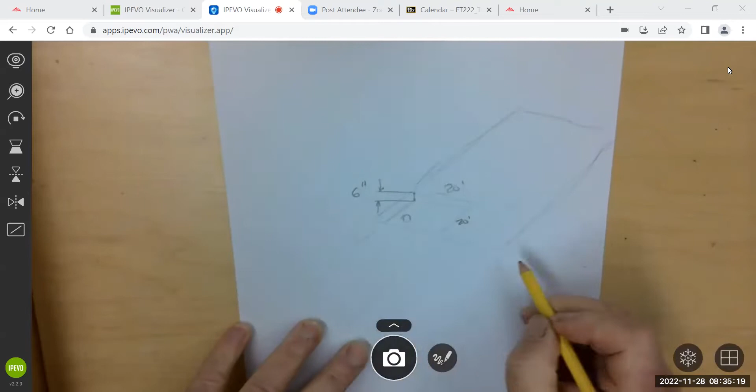Well, which dimension are you thinking here? So we got this dimension, I'm talking like the whole thing, like parking lot. Not the whole thing. So when we were out there, we identified areas of the parking lot that went to a drain. I mean, like, what should I title the sheet? Like parking lot runoff lab? Yeah, perfect. Parking lot runoff lab. Yep.

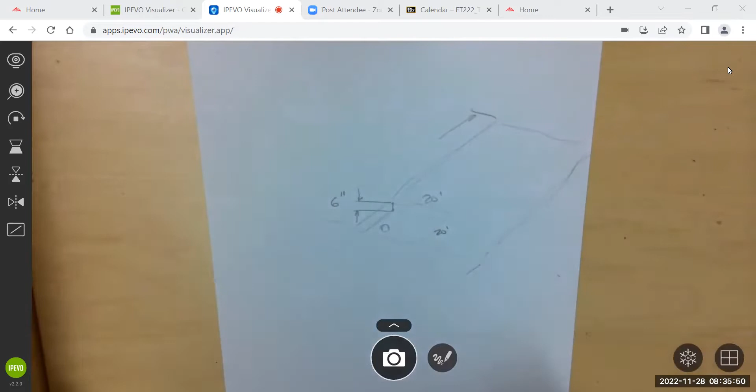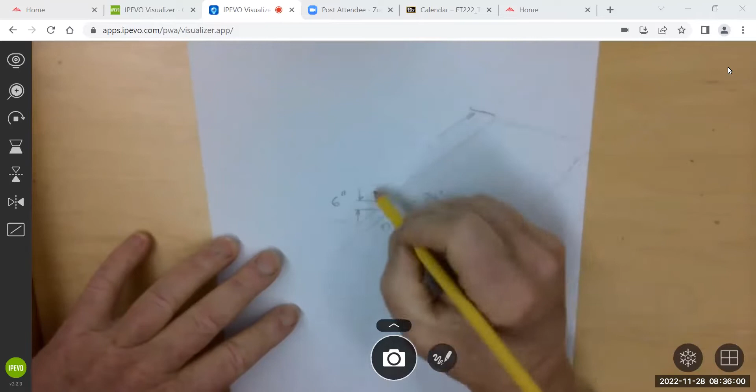Want the dimension? Yeah, if you got them. Yeah, so from this, the long one. Yep. Hold on, I'm adding it up. Or do you have it? Yeah, 123 and a half feet. Is that including the 20? Yeah. 123. Are you sure? Didn't you start at the bottom corner of it? I think when you started stepping.

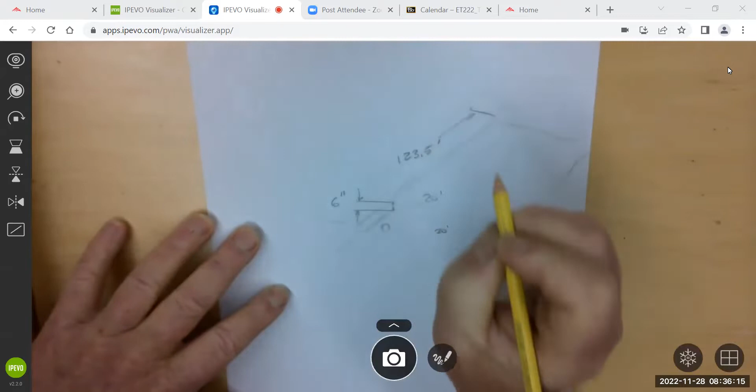No, like how she drew it and what I remember was I started at the corner. That corner of the 20 by 20 right there. Here. Yeah, that's right here. I remember, okay, when I went from left to right, that's where I started, but when I went from bottom to top, I started on the top right corner of the 20. You did start at the top right? Yeah, I started right there.

And went this way? Walked that way, and it was like 103. Yeah, so 34 and a half steps. Okay, so it was 103. Yeah, 103 and a half from that point to the edge. And then from left to right, it was like 42 feet. Oh, the overall? No, here. Yeah, from there, 42 feet. 42. Okay, perfect.

And we said an inch an hour? You wanted to do a quarter inch and an inch. You wanted us to do both. Okay, so quarter inch is when it starts to move. Yeah, and then an inch. Because we had this at 1 degree slope. And our goal was to determine if this was big enough, right? Before it enters the drain.

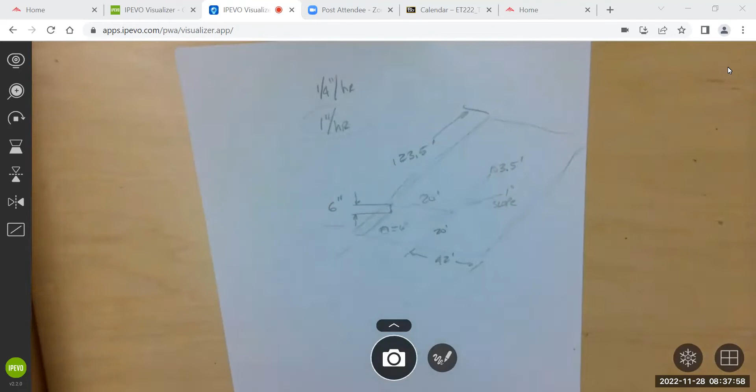So I think we're gonna say the drain is 6 inches tall also. So then we get this 20 by 20 by 6 inches of reservoir basically to capture this storm. And we're gonna do a quarter inch to see how much that is when it first starts moving. And then we'll do the full inch, which is the 100-year storm. Did I say 3 hours or just 1 hour? Okay, we'll just do 1 hour.

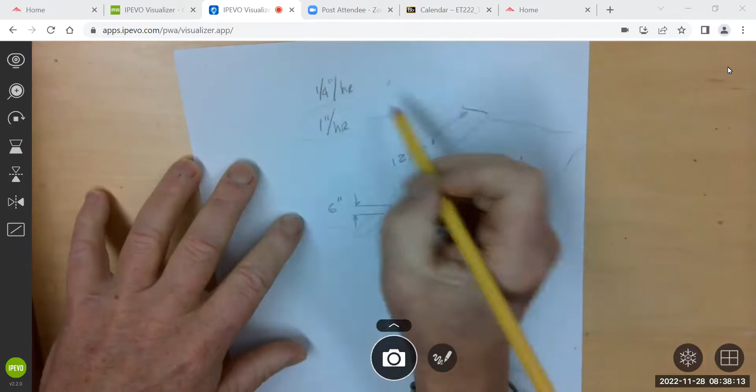What are we finding? So what you want to know is in both a quarter inch an hour, and actually it was just a quarter inch, so that would be probably the 15 minutes. But anyway, for the 1 inch per hour, it will fall in this area and it'll drain to here. Okay, we want to know if this is big enough because this is what exists in our parking lot.

So for the 100-year storm, is this big enough to actually absorb this water without going into the drain, which is really how we want those swales or rainwater capture systems to work. We don't really want it to exit into the runoff system. We'd rather have the ground absorb it. Keep it out of the storm drain system that exists.

So not everyone had all the data or had all the procedures, so we'll just let this one come in on Wednesday, along with the next one.

So all we're doing, we're getting not necessarily the flow, but how much. Yeah, just a quantity thing, yep. And then you get the area and the volume. Yep. It's really just a volume comparison is all this one is. Wow. The next one's more difficult, because that one's gonna be a flow comparison. The next lab? The next lab, yeah. I'll think about that.

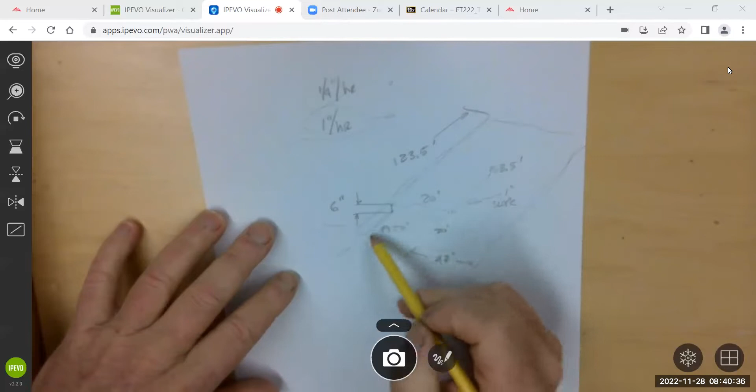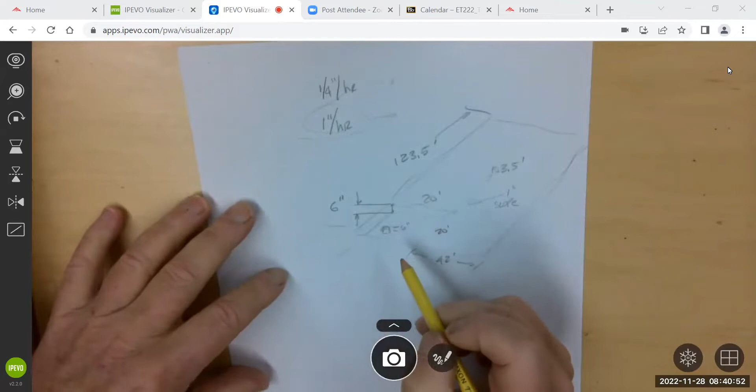Is that 6 inches of depth for everything or just? Yeah, it's 6 inches all the way around, 6 inches for that. There's a drain pipe that sticks up in the swale. So in this swale, or this low area, capture area, there's a drain pipe that sticks up 6 inches, has a dome to it, you know, with a kind of a screen. So if this overflows, it does have a place to go. It goes into that drain, but we really don't want that to happen. We want the system designed to accept the water and give it back to the ground.

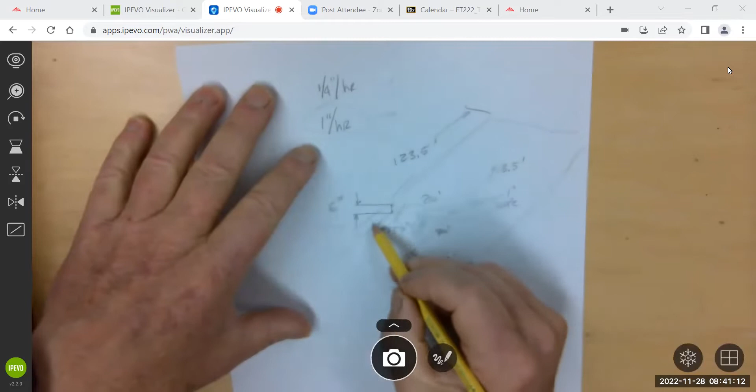So for the volume, we would just assume that everything is 6 inches. Yeah. And there's a bunch of plants in the thing too, like it's full of vegetation, right? Which is gonna do some absorbing for us once this water comes in. But by design, for sure, absolutely. Yep.

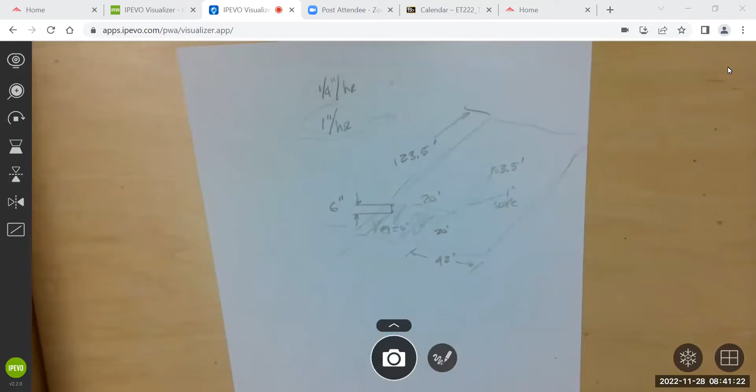We want to use the area of the 20 by 20 because the rain hits it, right? So it's kind of already collected. Yeah, you include that, absolutely. It's already collected there, so the water doesn't have to move there, it's already there. Yeah, so the inch an hour is gonna be over this entire area, right? It's gonna rain in the swale also. So this whole area sees the rain. So you do want to include that with your calculation on volume of water going into the system.

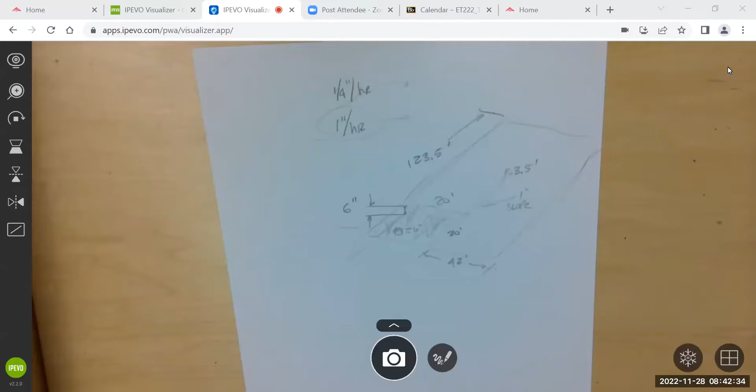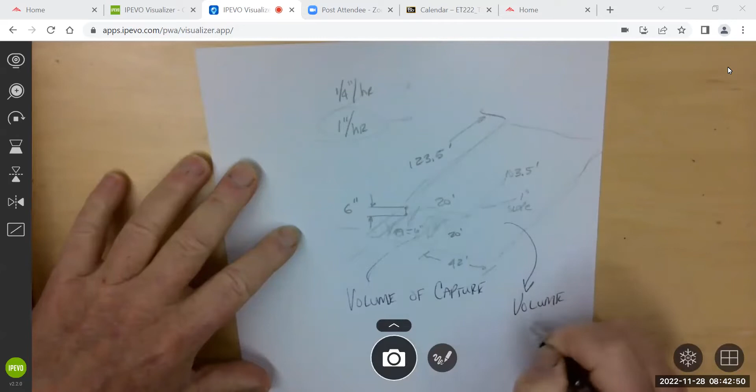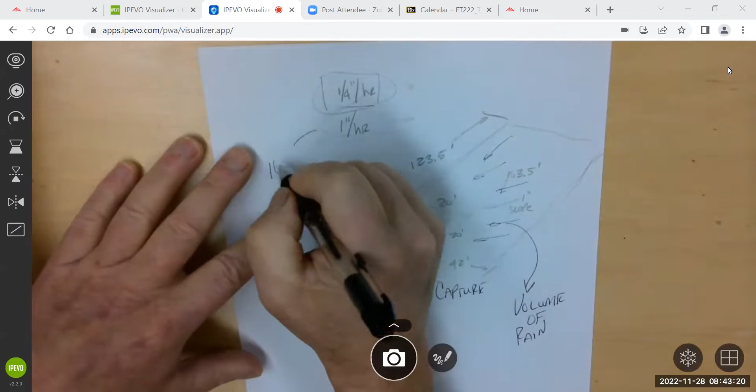That's 1/4 inch per hour and 1 inch. Yeah, so the 1/4 inch is when all the water starts to flow. So we do that calculation often, just to see, okay, water's beginning to flow. What kind of an impact is that gonna make in the swale? And then the 100-year storm will put down an inch an hour. So then we want to see, okay, in the worst case scenario, is this thing gonna work?

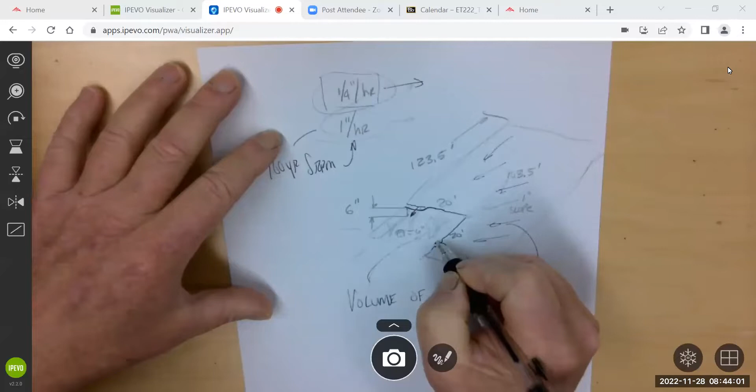Like the 1/4 inch an hour would be what we would do if we were gonna do an analysis of, say, because there's a low area, right, that comes down that provides a trough for it to flow in. So maybe we were gonna calculate, like, are those two low areas big enough to take the 1/4 inch an hour of water that's gonna start flowing, right? You would use it for that. But we're not doing that. They were pretty big. I'm sure they accepted just fine.

And this is not including any of the fact that there were the plants in there that are gonna absorb the water. That's right. Assuming that the drain itself would start receiving, we wanna know, would this thing collect all the water before it has to drain? Yep. Okay. Yeah, so the theory is, if it collects and holds the water, then that vegetation will just help dissipate it. It creates a network system in the soil.

It's not that the plants absorb the water, they do, but not much, right? They're not that big of plants. But they've created a structure of soil that allows the water to go into the ground. Rather than if you didn't have any plants in there, it would just become hard packed, or that doesn't absorb. It basically would turn to not concrete, but pretty close. So that's why they put those.

And I think it's very rooty vegetation they put in there, like grasses and things that, like, if you've pulled grass before, that structure is, like, you pull it and then most of the soil comes with it because it's created this mat that will absorb water. So you're probably getting another full 6 inches of water absorption, that allowed the upper 6 to go into the ground.

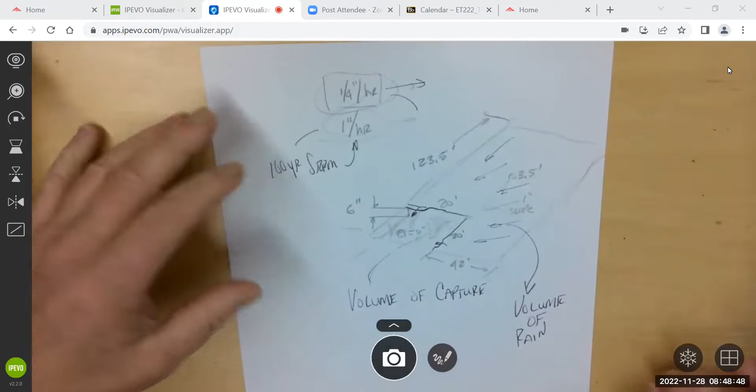Okay, on this next one, you have multiple things to do. This is a bigger lab. And this will be our last rainwater runoff lab. We'll move on from there. So I am recording this, so you can go back if you miss this first part. I'm pausing because there's an engineering meeting going on. I'm gonna let that meeting finish.

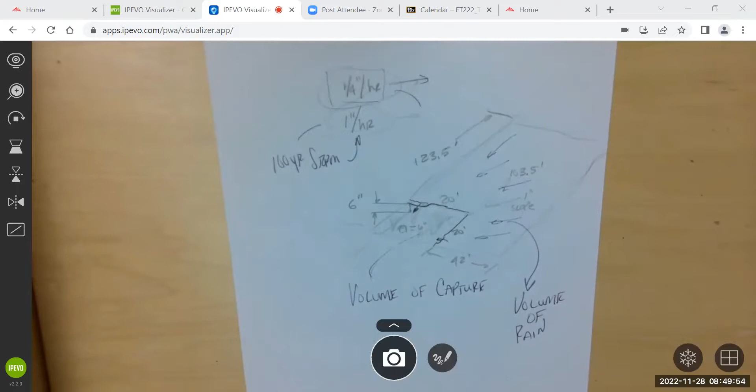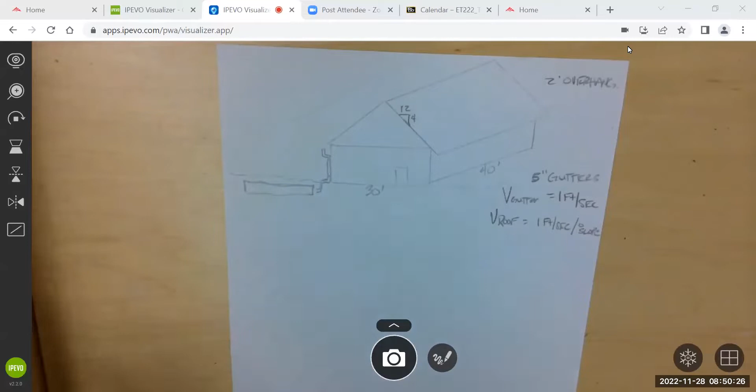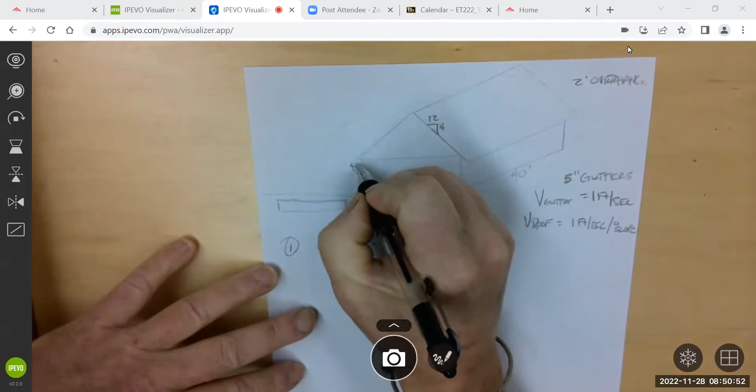All right, so the next one is gonna be a rainwater roof calculation, and we're gonna check several things. So let me just write out what we're gonna check, and then we'll talk our way through it. So we're gonna go and check gutter size. And these are 5-inch gutters. That's what they're called. If you look that up, it doesn't mean they're 5 inches deep or 5 inches wide. It's just a call out for a gutter size. There are 4-inch, 3-inch, and 5-inch gutters. So just look it up and you'll get a profile and you can come up with an area. An approximate area is fine.

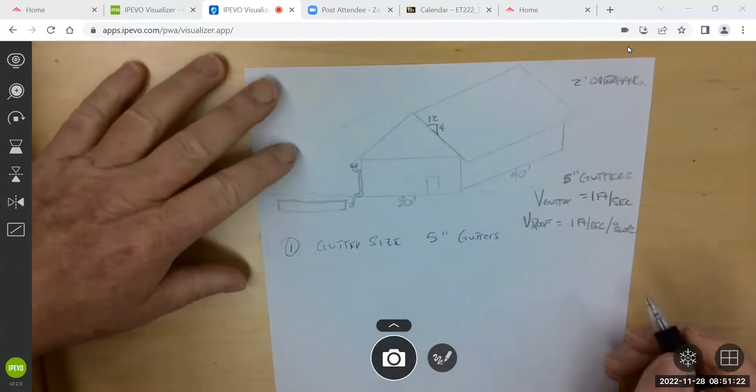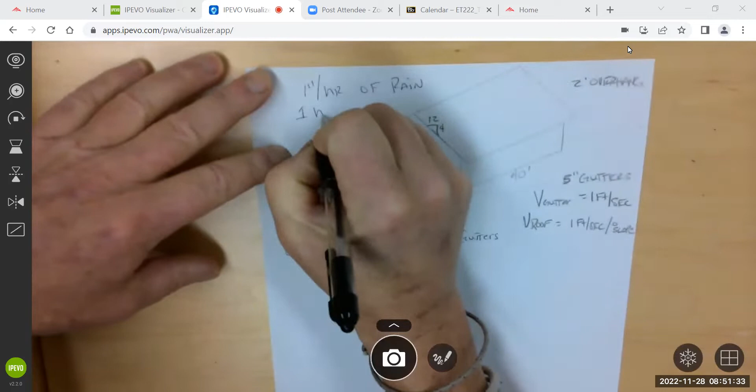We're gonna work with 1 inch an hour of rain, and we'll just do 1 hour. So that's how we'll get our volume. Our roof pitch is 12/4. So that sets up an angle that you can calculate. And actually this drawing is not to scale. That's closer to a 6. So really a 12/4 is pretty flat. I just happened to draw it kind of pitchy. Okay. But what that'll set up is an angle that you can calculate in degrees.

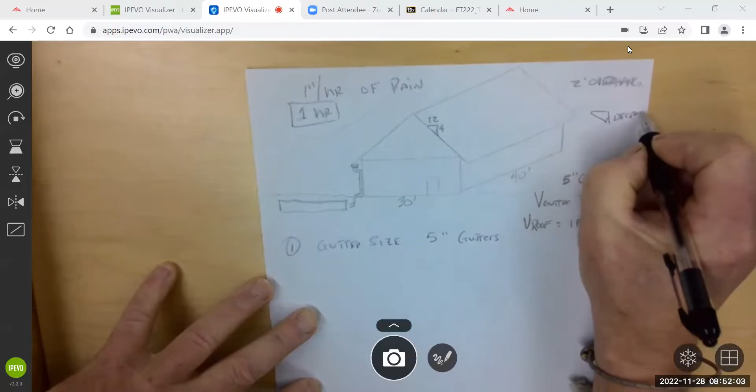Right? We can all do that because it's a 12-4 triangle. So you can just use your 12 and your 4 and the tangent to get this angle, right? Theta. Everyone with me? Okay.

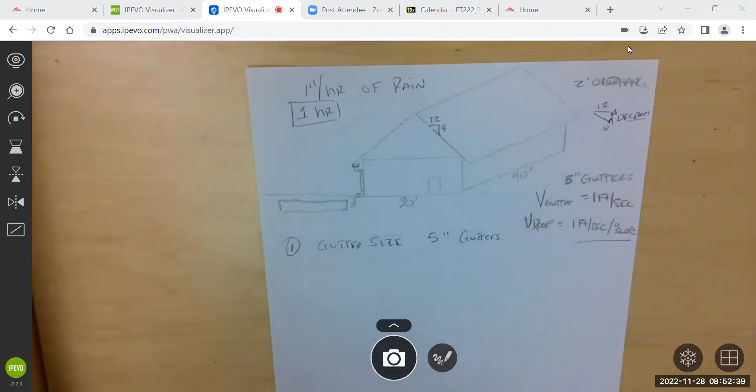For every degree, we're going to get 1 foot per second of velocity. So your standard sidewalk's like a 1 degree slope, right? That's where we got the 1 foot per second. So if it was a 10 degree slope, you'd definitely feel that. That's quite a slope. That's going to be 10 feet per second of velocity. Okay, so whatever you calculate for the angle of your roof, that's going to set up the velocity of the water.

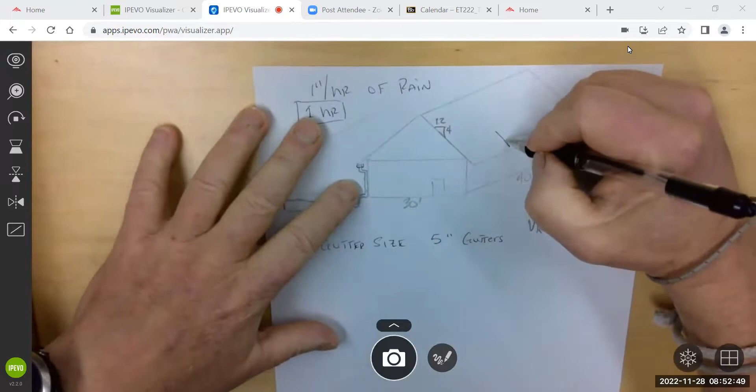For every degree, you're going to get 1 foot per second. Makes sense? So maybe we should calculate that because then we can talk it out. I'll just do it real quick. 12, 4, and tangent. It's supposed to be the arc tangent, sorry. Anyone get a number? Theta? Yeah, so if you set up 4/12, the tangent of the angle equals 4/12, so it's going to be the inverse tangent. 18.4.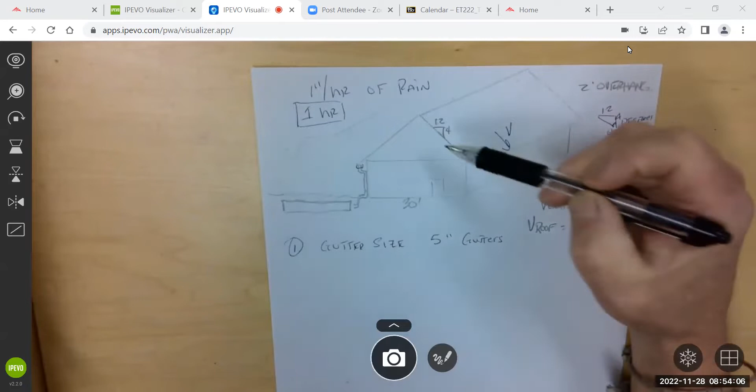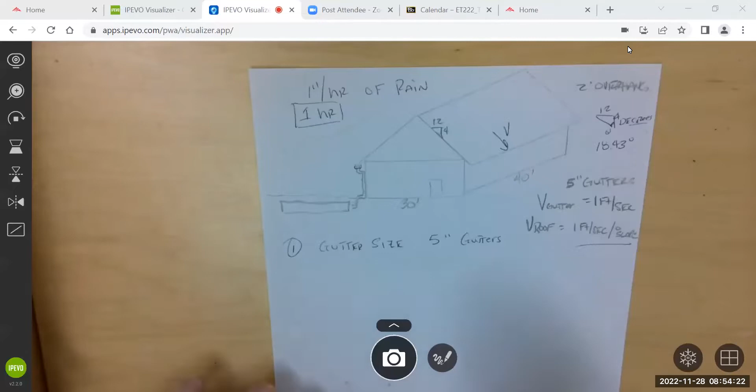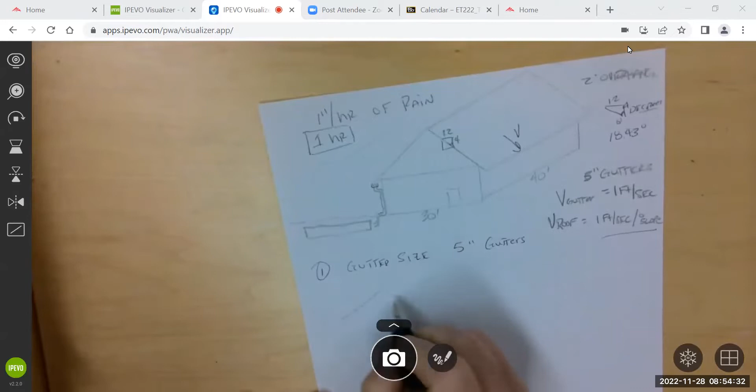Inverse tangent should be 18, yeah, for this lower one. For this little one, that's this one up here. If you did 4/12, right, we want that smaller slope. 18.43 is what I get. It's 71. You did 12/4? I did 4/12. It's opposite over adjacent. So for this one, yeah, but we want that lower angle because the roof pitch is going to be super flat. So we want this angle. We don't want this angle up here.

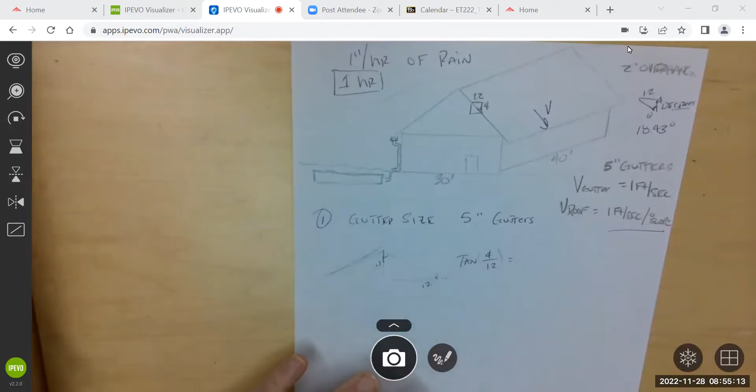We have an adjacent of theta that is 12. See how we drew the bottom triangle? We want this angle. 4/12, right? Tangent, 4/12, okay. That makes more sense. So that sets up our velocity at 18.43. So that would be 18 feet per second. Yeah, 18.43 feet per second.

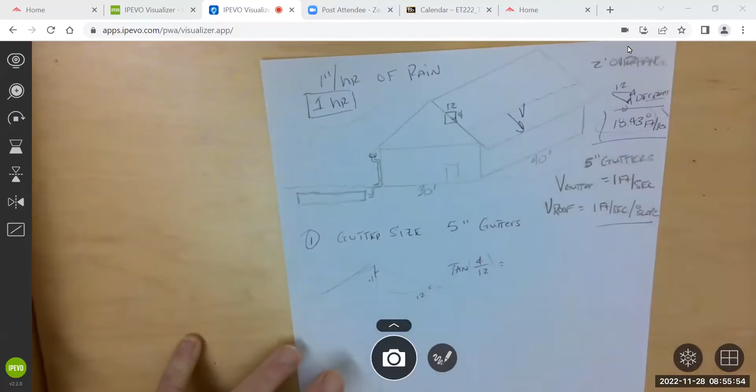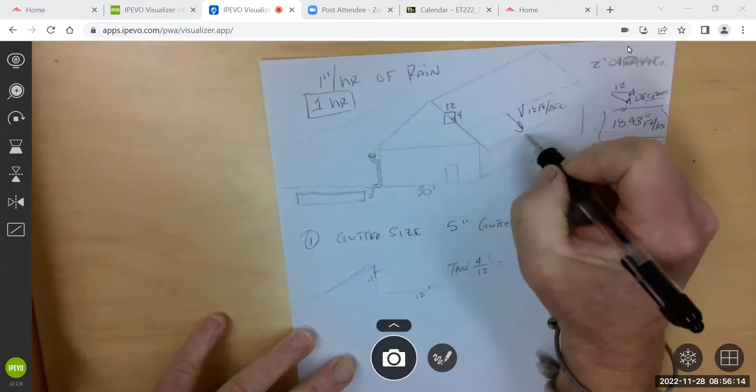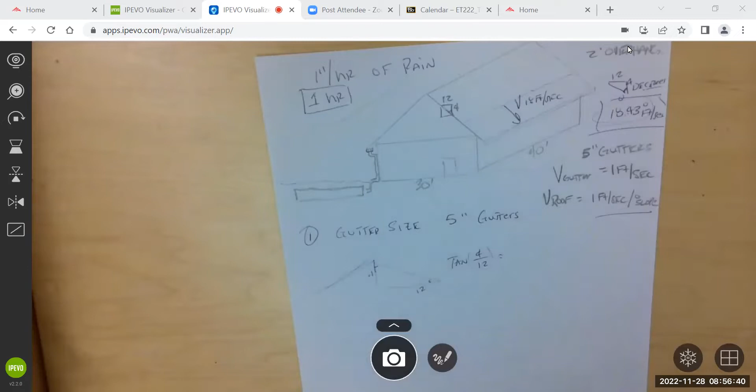Remember, that sets up how much water heads into the gutter. 18.43 feet of the roof. I don't know how long this roof is. Maybe it's not even that long, so maybe then the whole quantity of the roof goes. But this is going to be 18 feet per second. So every second, 18 feet of the roof exits into the gutter. Makes sense? So if the roof is 13 feet long, then the whole roof is going to exit into the gutter. If the roof is 30 feet long, then only 18 feet of it is going to exit in 1 second. And that's 18 feet up the roof. That's correct. So that's how you get the 1 second volume that's coming into your gutter.

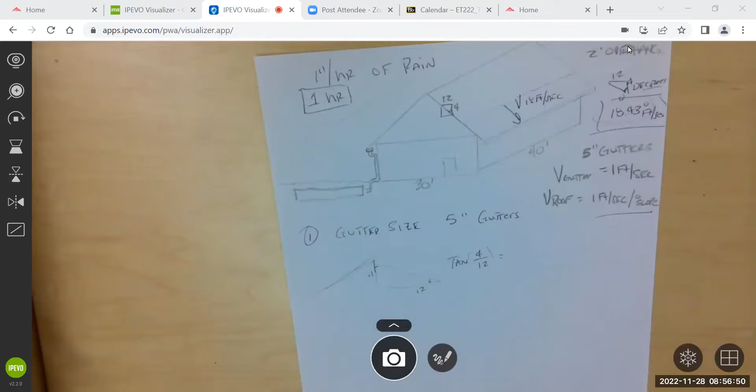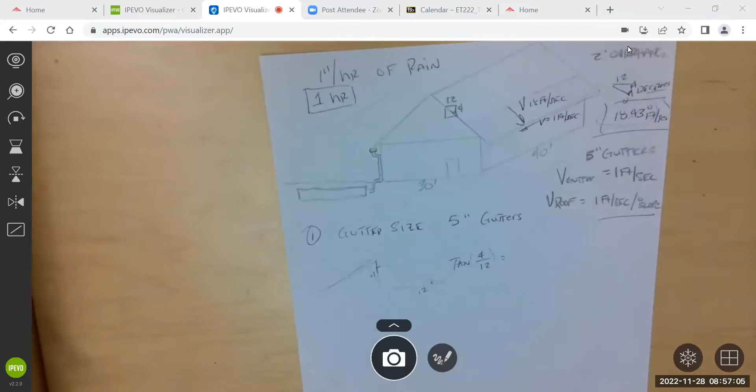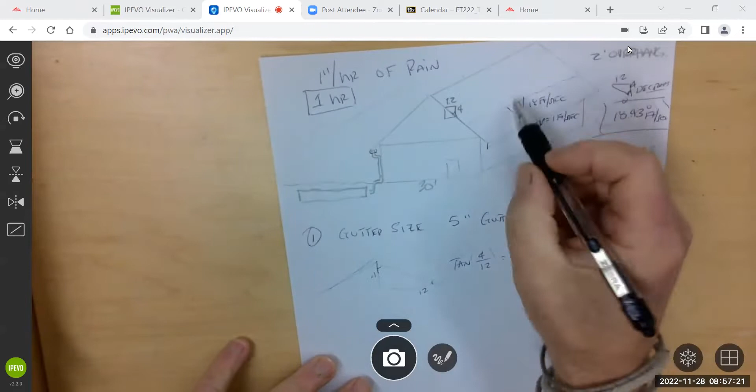And then how fast is it exiting? What's the velocity in the gutter? Foot per second. Unfortunately, gutters are pretty flat. They have slope to them, but just barely. So it's easy on the eyes, or? Well, because you have your fascia board, right? On a house, your fascia board, depending how long this run is, might be 8 inches, which is actually 7.25 inches. That'd be a big fascia board. A lot of times they're just 2x6 fascia boards.

So your little gutter, sometimes 4 inches, would be down low here and up high here to provide some slope. If you look at a gutter on a fascia, it should be lower where the drain is and higher at the other end. If it's put on correctly, it's got to have slope. You don't want your gutter to fill, you want it to empty. You could put a 2x12 and a crazy slope on your fascia, but they don't do that. It looks terrible. So you really only get a foot per second of flow.

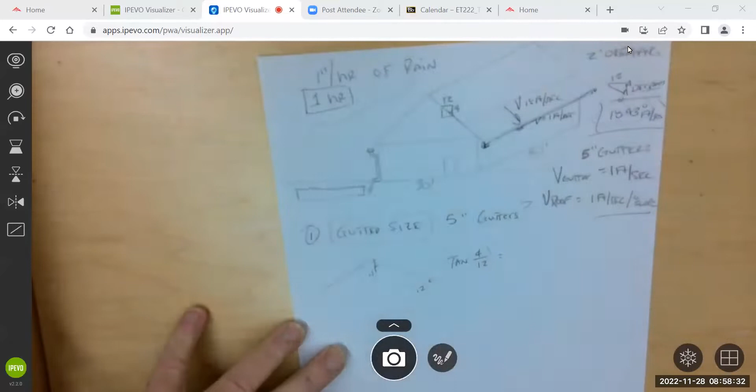So if we have a foot per second exiting and 18 feet per second coming in, there's going to be some backup there. So that's what we want to first check, our gutter size. Is it big enough for this situation? 1 inch an hour of runoff. And we'll do the same thing. We'll say it's a 1/4 inch buildup on the roof before it starts to flow. The whole inch isn't going to fall on the roof, sit there, and then flow at once, right?

So during our 1 inch an hour storm, once we get a 1/4 inch on the roof, it starts to flow. It's actually a little faster than that if it's a metal roof, and it's actually a little slower than that if it's a composite roof.

So say 5-inch gutters, is that how deep the gutters are? No, look them up, Google it. Okay. So they're classified as 3-inch, 4-inch and 5-inch gutters. So when you order gutters, he's going to say what size gutters you want. You'll say 5-inch. That can mean that they're like 4 across and 3.5 deep. That's a 5-inch gutter. I don't know where they get the 5 inches for sure.

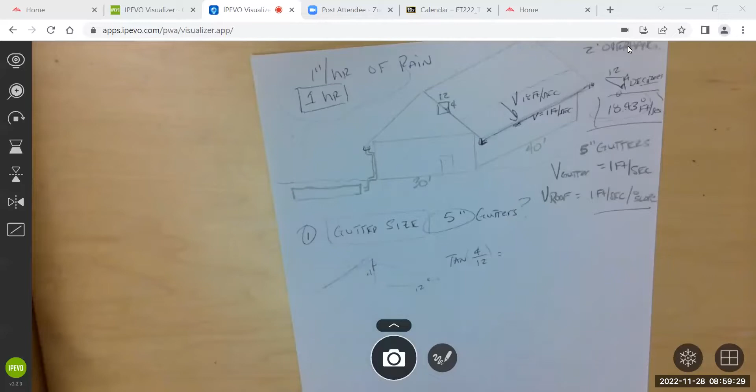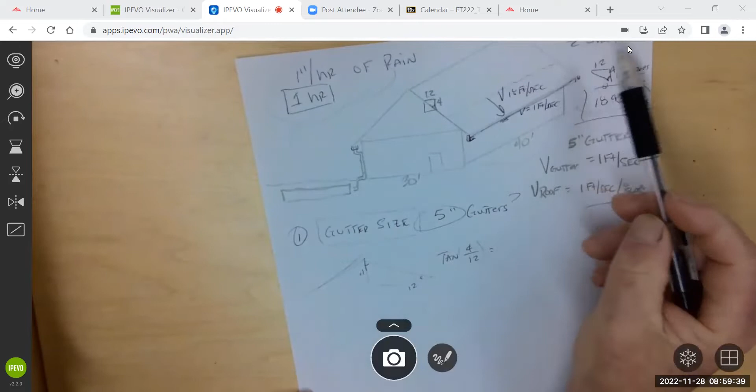And then how do we find the area of the roof? You have the pitch, you have the 30 feet by 40 feet, and then you have a 2-foot overhang. When you say 2-foot overhang, is that like the roof just keeps going 2 feet, or is it exactly 2 feet from the wall? No, the roof keeps going. Okay. 2 feet past the wall. That's both ends.

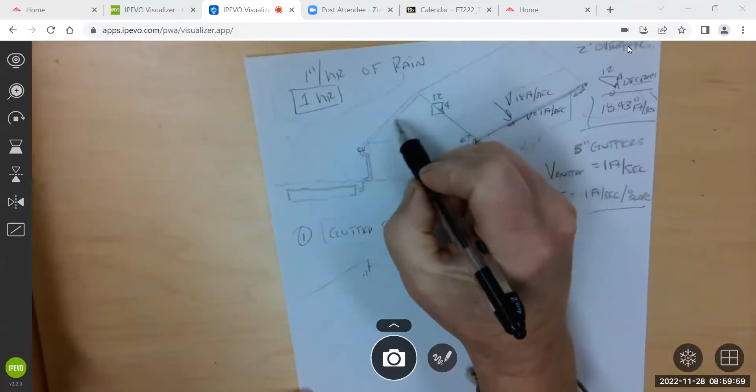So I could maybe draw that overhang in on this side if I was really good with my 3-dimensional drawing, right? So it sticks out 2 feet here, and you can see it better in the back here. It sticks out 2 feet past the wall. Also 2 feet out here, right? 2 feet out here. But you don't need that. You just need this length here. Actually, you do need that.

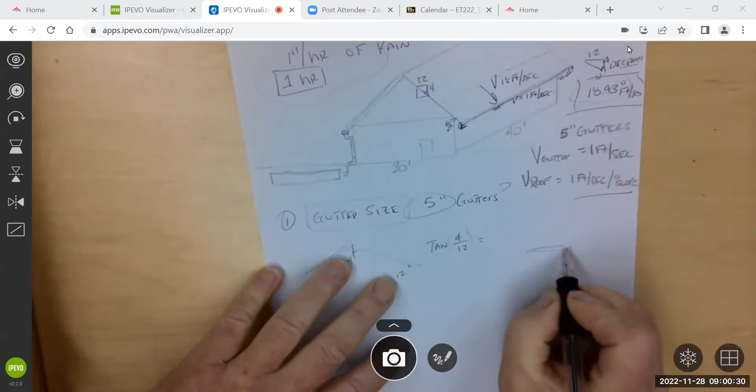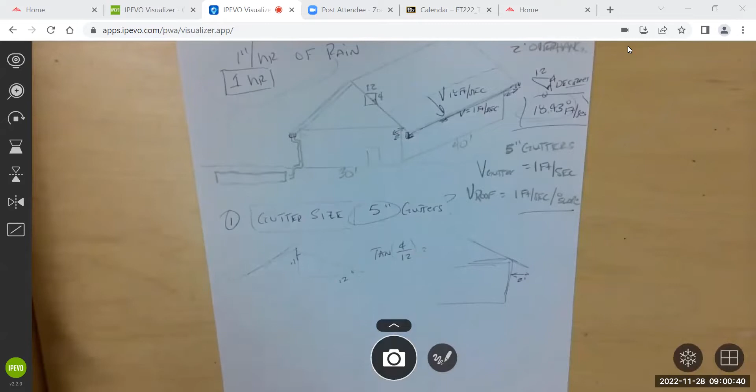Yeah, so if you draw the profile, and different contractors do this differently, that's for sure. But here's your roof overhang, right? Here's a wall. Follow me? Yeah, this should be the 2 feet past, not lineal feet of the roof. Yeah, that's what I was trying to figure out. So you'd have to, again, triangulate this to get this X distance to add to this distance that you calculate, to get your full roof size.

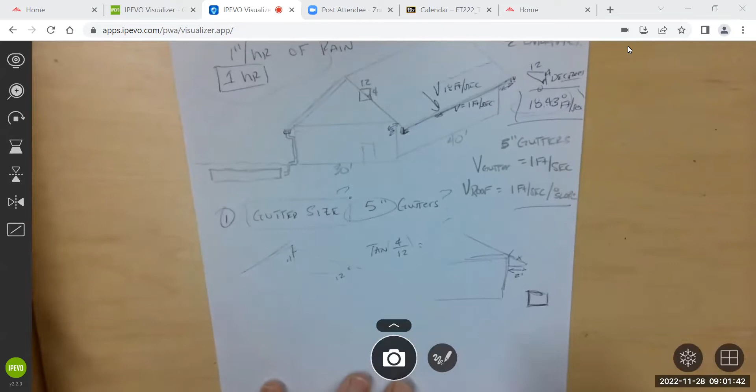All right, so first thing we're doing is checking gutter size, right? So 5-inch gutter, Google says it's 5 inches wide and 3.5 inches deep. Okay, so it is a true 5. Perfect. And you can keep it simple. I think gutters often have some slope to them, but you can just make it square or rectangular, just keep it simple. Some of them have some kind of fancy curves to them. Don't complicate it, just make it an easy area to calculate.

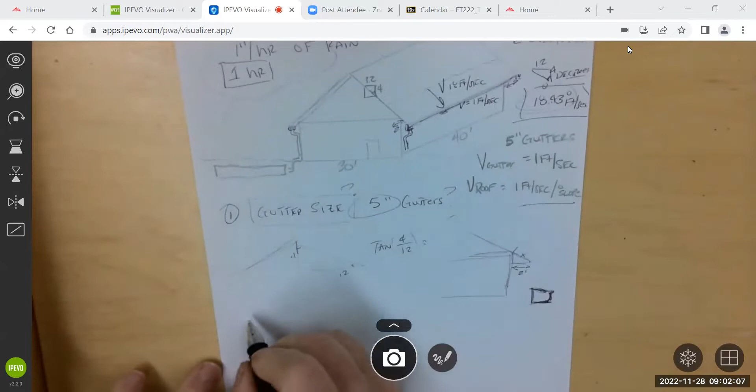All right, so then we're gonna put a single downspout on our run. That's a long run for a single downspout. So that would be the second thing, is to check the downspout. Is it big enough? And again, you can look up downspout size for a 5-inch gutter, I think that's standard. So you should be able to get a certain amount of volume flow rate out of this gutter, right? And then you're just going to check if there's enough area in the downspout to accept that flow rate.

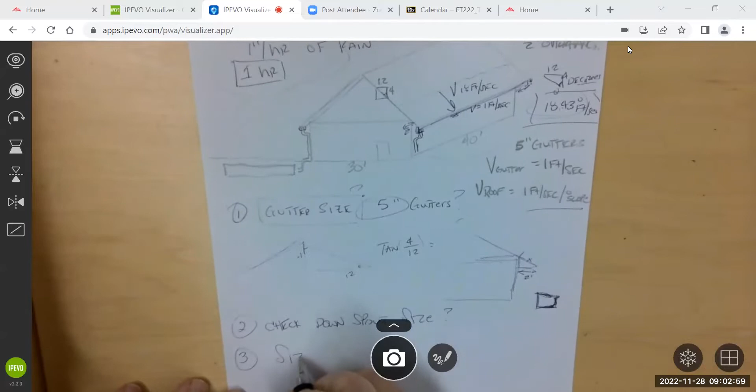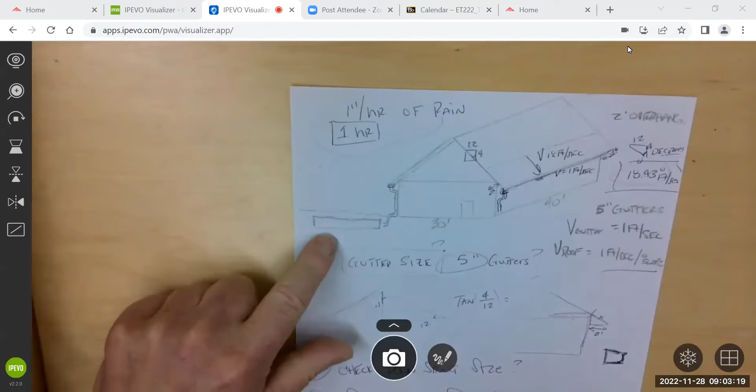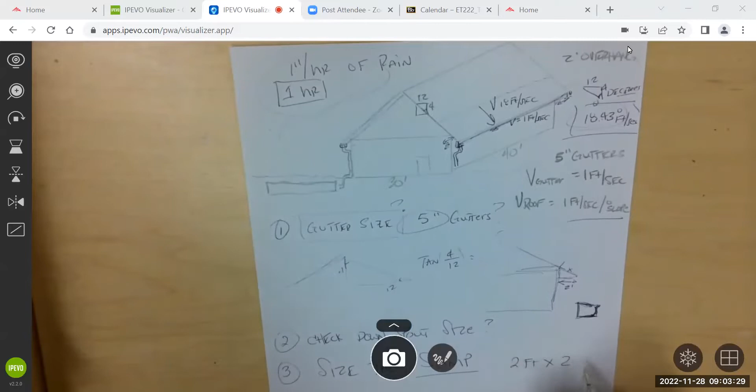And then the last thing you're going to do is size, I'm going to call it a sump, or the catchment. And this is going to be the underground catchment, which is a requirement now. It can be above ground in planter boxes, but we're going to make ours underground. And we're going to make it 2 foot by 2 foot by however long you think it needs to be.

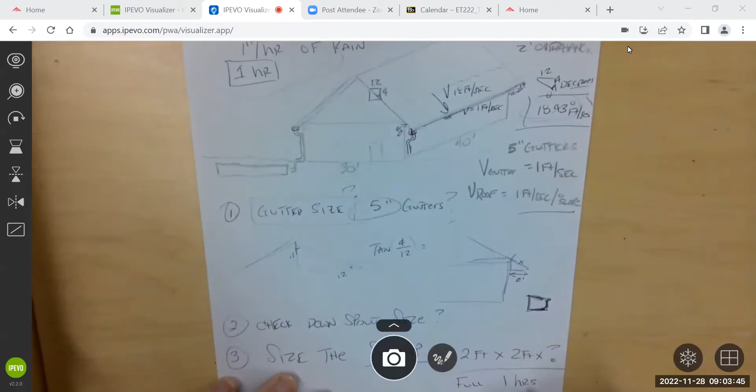So again, you're going to get a volume of water coming out of your downspout. We want to use the full 1 hour for this. So once you get a flow rate, your flow rate could be in cubic feet per second, or cubic feet per minute, whatever you come up with. We're going to say that storm hits for an hour, and we're going to have to size this rainwater sump or rainwater catchment system. And the ditch is going to be 2 foot by 2 foot by some length.

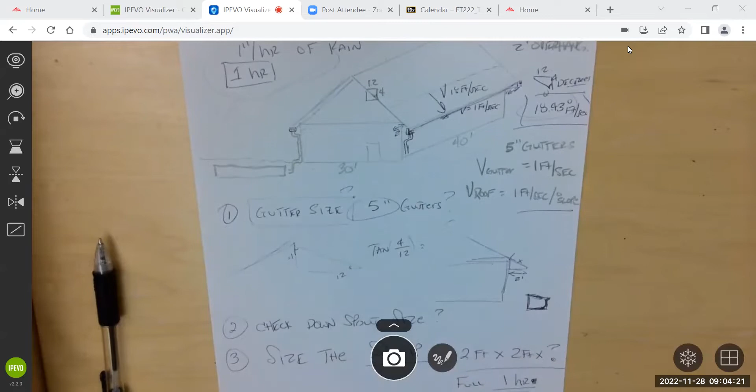Alright, so let's say the gutter fails. Yep, right? We don't have a big enough gutter. When we go to part 2 to check the downspout, you just want us to assume that the gutter works? Yep. Okay. Let's just assume that we add downspouts to make it work, and all of that's going to run. And both sides are going to run. Both sides would typically run to this system. Like you don't put one in each side. Yeah, no, it's a real deal.

Oh, that's blurry as heck. Oh, there we go.

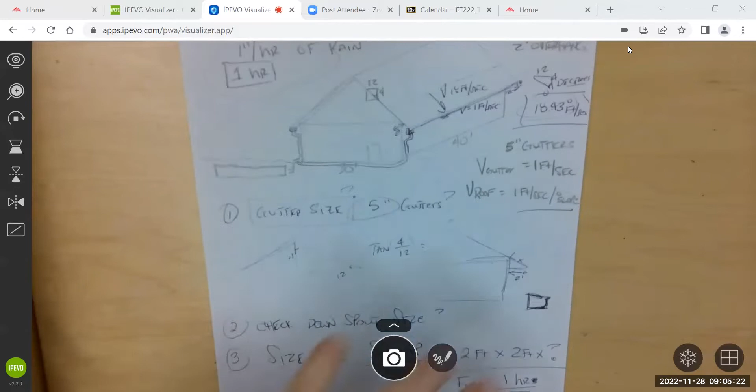And then just imagine doing the 150-home subdivision. What kind of numbers you're going to come up with that. So we won't do that, but if we make this work for every home, then we don't have to accommodate all that water that would run into some kind of piping system.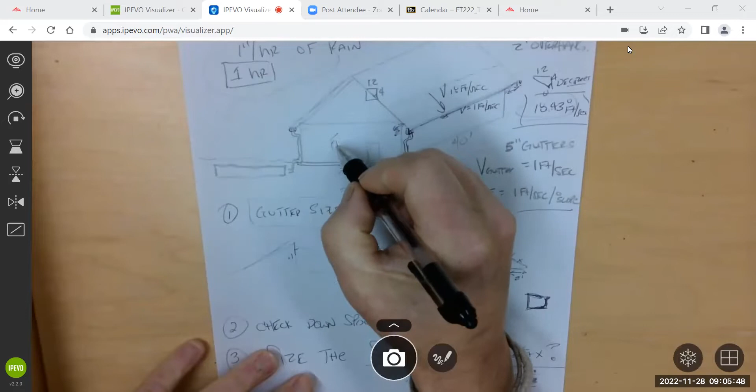The area of the roof. So you have 2 feet spanning over on the left and the right. We also have 2 feet spanning over the front and the back. Let's call this the front, right? So 2 feet this way, 2 feet in the back, and then 2 feet on the eave. This is called the eave.

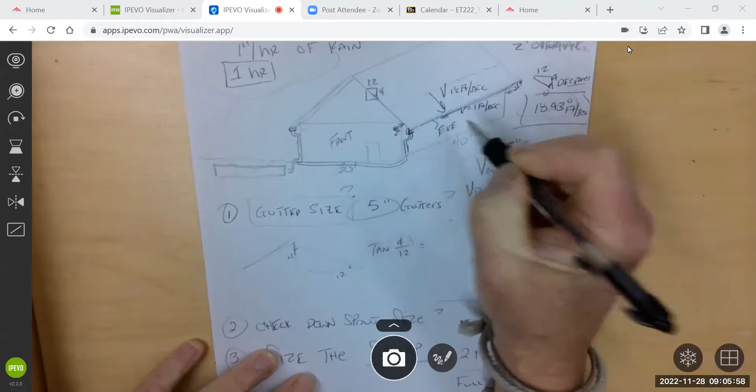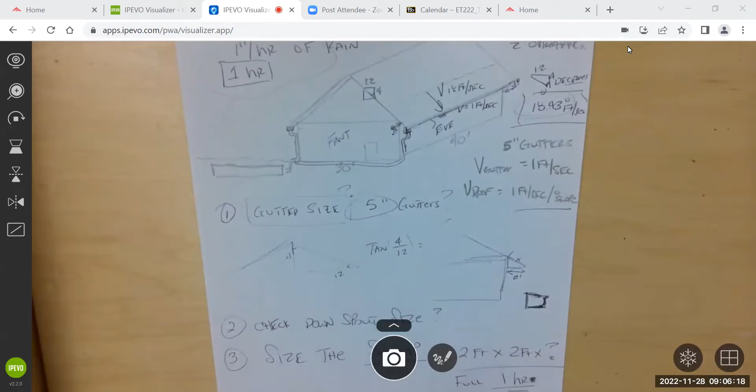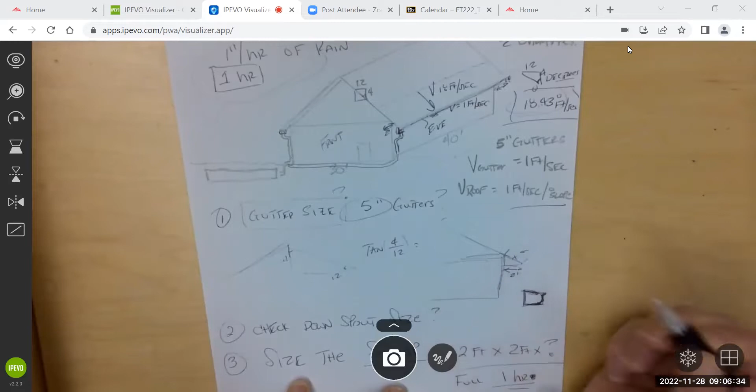So from looking from the roof down, the building looks like it's 44 feet by 34 feet. Like if you look straight down on a floor plan, yep, that's correct. I'm okay with that number, 44. The 44 is for sure right. But the 34 is not correct because the 2 foot is an X distance. So if you want to be really accurate, you would actually calculate this distance, which is going to be longer than 2 feet, to add to this roof, right?

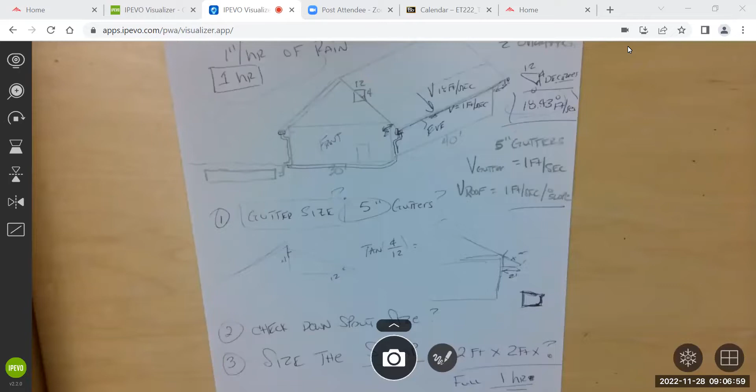Questions? So gutter size first, can it accommodate this? 1/4 inch running at 18.43 feet per second into the gutter. Gutter is exiting 1 foot per second. This is a dynamic fluid problem, but we're not going to work it that way. You're going to work it in 1 second intervals. There's this much water in 1 second going into the gutter. The gutter has this much volume. Did that work or does that not work?

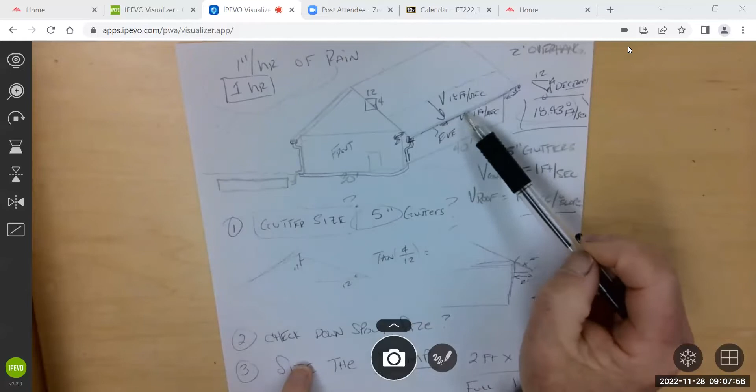If it works, great. In that 1 second, also, there's a certain amount of water exiting the gutter, right? So you could do that balance to determine if it's going to accept it or not. The gutter does have a hole in it. A certain amount's going to leave in that second. So that's the first part. The second part is now you have a quantity that's flowing into this thing. You should be able to come up with the volume flow rate and compare it to the area that's available and see if that volume flow rate could exit going down. The velocity here can be much greater, so it takes water faster than it receives water. That's important to think about.

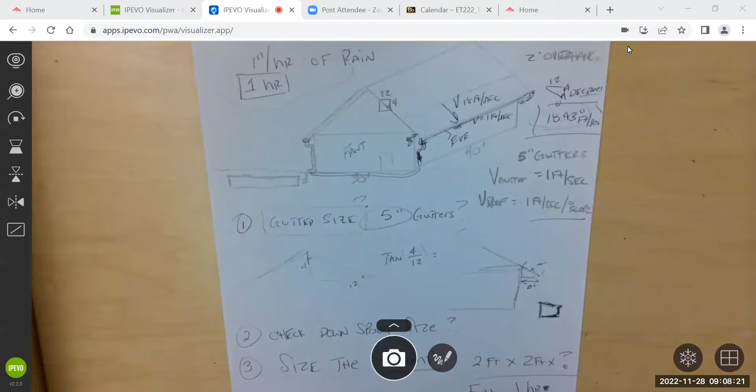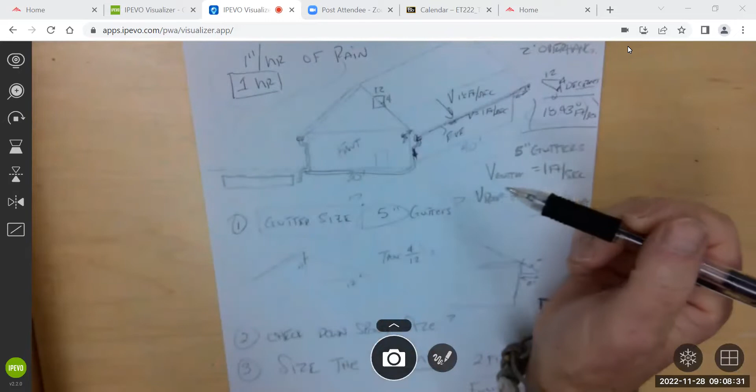Then we have this flow rate coming through the pipe system. We want to double it. It's going to be the same on each side, so you shouldn't have any extra work to do over there. And then you have a volume flow rate coming into this, and you have to accommodate it once you get it. So over that hour, how much water is going to come in? How much area is needed to absorb it? There'll be some complexities when you go to work it.

Are we gonna need the flow equation for this? Probably not. I think you'll have to make some assumptions along the way, like the flow rate down the downspout. That'll have to be an assumption, falling water type of thing. But a pipe that's vertical, you should be able to come up with a volume flow rate for that area. Come up with a velocity that you think water will fall at. You probably could even Google the velocity of falling water, and that'll be your flow rate of your downspout, right?

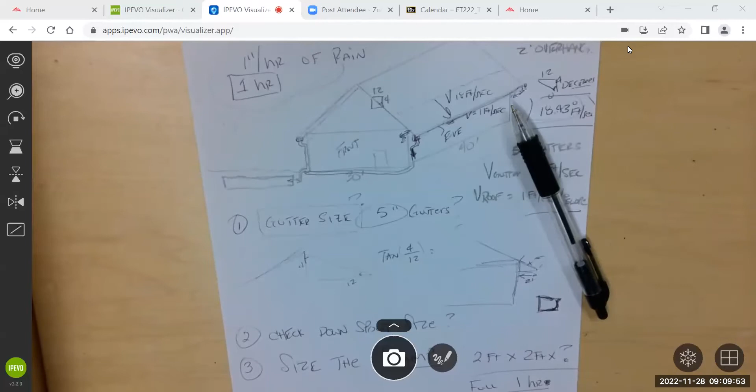And then if you look at the volume that's coming into the gutter, you should be able to make that comparison and say, oh, that's nowhere near big enough, or, oh, that'll take it easy, right? We're not going to add in like 400 leaves that complicate the system. At least in my house. All right, that's it. That's your lab.